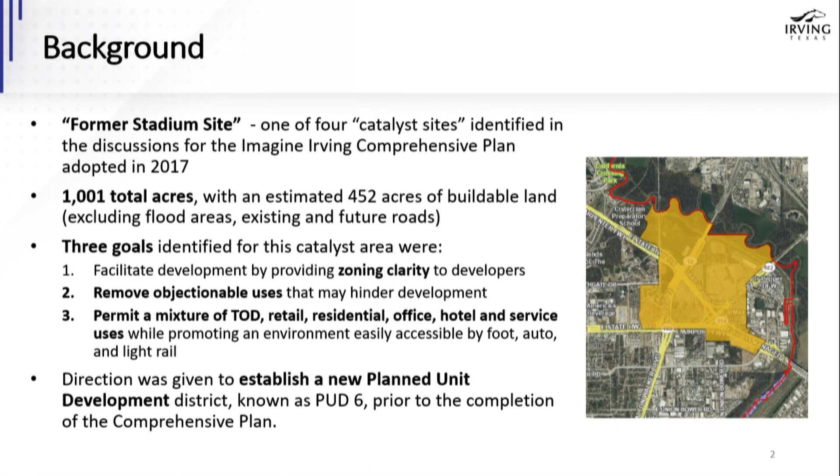There was direction given at the time that a new planned unit development district known as PUD 6 should be looked at prior to completing the comprehensive plan. They really wanted to take action and do that. So PUD 6 was actually developed and adopted. It was written, reviewed, and adopted over the course of about a 6-month period in 2015, and it encompassed this 1,000-acre tract that we identified.

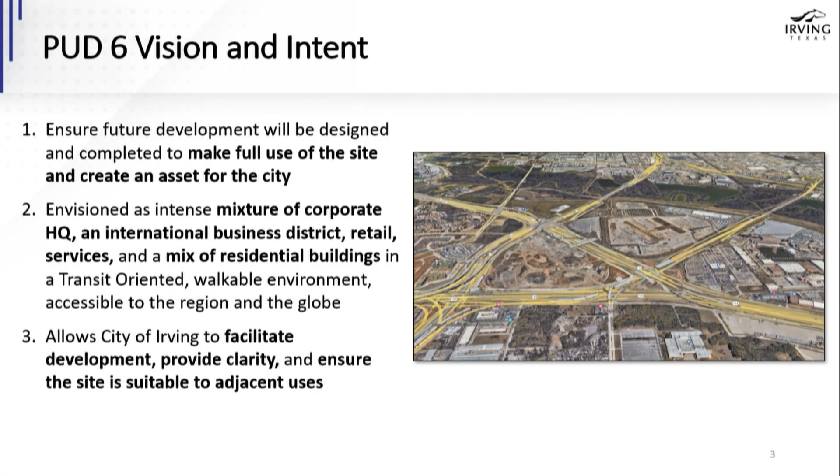The intent of PUD 6, Planned Unit Development Number 6, was really three purposes identified in Exhibit B to that ordinance: to make full use of this property as a city asset, envisioning that broad mix of uses, contemplating something that would be a national and international destination, and then a regulatory structure that would allow the city to facilitate development, working with the developer, providing clarity so the site would be suitable for adjacent uses. So that was the vision and intent of the PUD 6 regulatory structure to begin with.

It is divided into 8 tracts, titled A through H. Each tract had a unique mix of uses permitted, with minimums and maximums in terms of non-residential and residential development. Tracts A, D, F, and G -- Tract D, for your reference, is the city's property, the former site of the Texas Stadium. Tract A is the subject property of this ordinance tonight. F and G are owned by the University of Dallas. It was envisioned that those would be transit-oriented developments, meaning a development that would link transportation and land use.

Providing people with maximum choice of how they get around, and really intensifying that land use at transit nodes, where you might have light rail stations, making and allowing a more intensive use. It typically would be a mix of uses, residential, commercial types of uses that would all be kind of living harmoniously in a transit-oriented development.

So tracts B and C were identified as flex work. You can see that's on the eastern side of 183, on the north and south side toward the eastern end of the property. By flex work, it was primarily an industrial area.

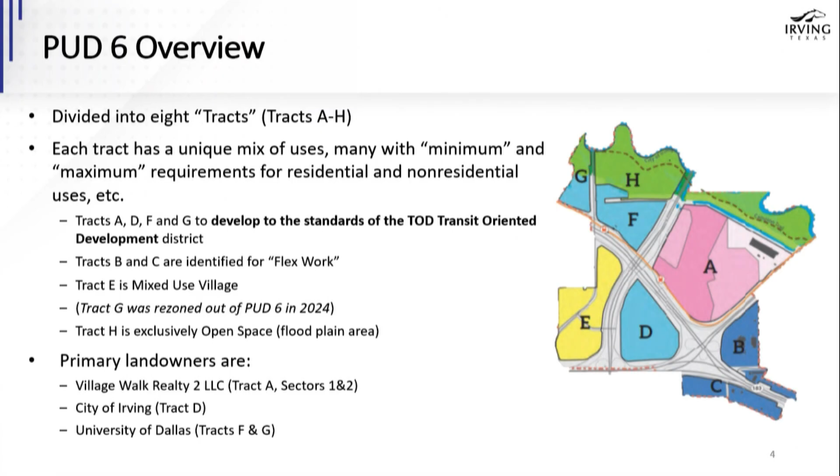There are 3 primary landowners: Village Walk Realty 2, which is the owner of Tract A, sectors 1 and 2. By sectors 1 and 2, you can see there's a couple different shades of pink. The 2 darker shades of pink in Tract A constitute sectors 1 and 2. Sector 3 is actually the FedEx facility. City of Irving, as I mentioned before, owns Tract D, and then University of Dallas owns Tracts F and G.

So in 2023, the Planning Department staff initiated a review of the PUD 6 regulations. In October of that same year, we presented a summary of the findings, along with some recommendations to clarify and improve the regulatory structure of PUD 6. Specifically in mind that we hadn't had a lot of development in PUD 6, with the exception of Tract E, where we had some residential and multifamily development. There was a concern that we really needed to address some issues that staff had identified since the ordinance was adopted in 2015. So we presented those to the City Council.

I think, Jocelyn, am I correct, this was also presented to the Planning and Zoning Commission as well. And the Council asked us to initiate meetings with the property owners, have some discussions, and as those discussions progress, bring back some specific proposals to the City Council that could be reviewed.

During the time we were having these conversations, the new owner of Tract A, Village Walk Realty 2, identified the possibility of a unique and significant development opportunity, this concept of a destination resort. This was a new concept, and so we paused our work on updating the PUD 6 document in order to better understand how that new opportunity might fit within the larger effort to improve the regulatory structure of PUD 6.

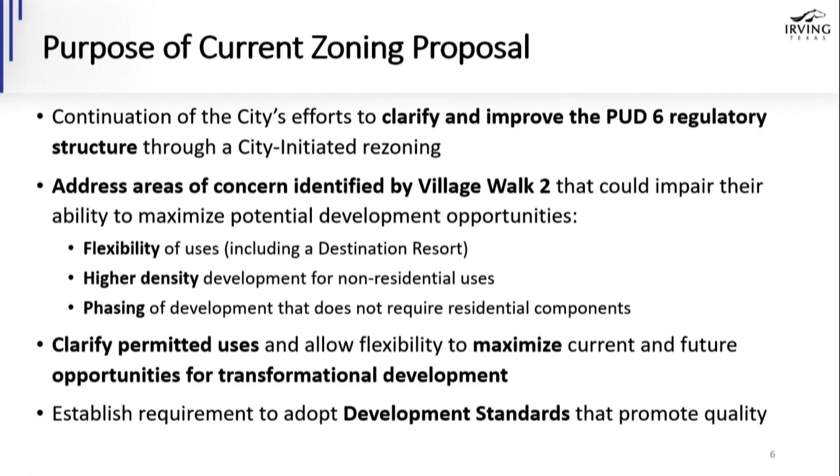All the remaining tracts, including the FedEx property, all tracts B, C, D, F, and H, will remain in PUD 6 as they're presently zoned. So the only property affected by this zoning proposal is what you see identified in purple.

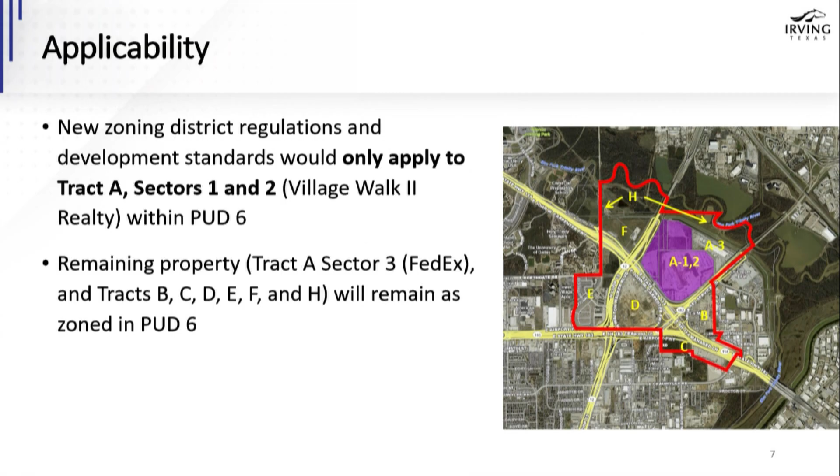So there are 2 proposed amendments. The first one is probably the most consequential: the creation of a high-intensity mixed-use zoning district for PUD 6. The purpose and intent, outlined in the preamble of the ordinance, is really to create an identifiable multi-use area that encourages concentrated development in the same structures or in proximity, in an exciting, engaging environment that maximizes the value of the property within PUD 6.

It establishes permitted uses. It establishes a process for creating and approving development standards, which are really quite important. And it establishes an administrative process for approving regulating plans as the property develops. I'm going to walk through the full ordinance with you and map out how this all flows together. It's a fairly simple ordinance in its structure.

The second ordinance is to amend PUD 6 Exhibit B and designate this property, Tract A Sectors 1 and 2, for a high-intensity mixed-use area that would conform to the requirements of this zoning district we're creating. So we're creating this zoning category and then assigning that zoning category and all its rules to Tract A Sectors 1 and 2. It's a 2-step process.

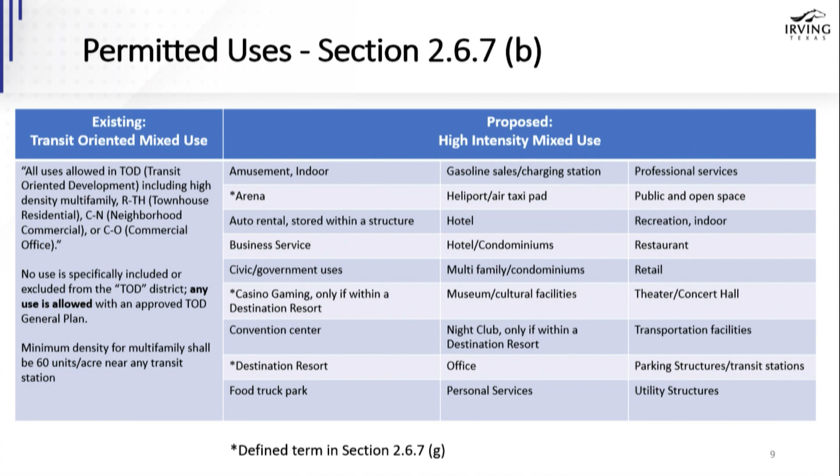We also identify prohibited uses. In the current transit-oriented mixed-use district, there are no expressly prohibited uses. Again, it's silent on uses, depending on the applicant to propose uses through the TOD process, is how that works. Jocelyn, shake your head or not if I'm getting any of that wrong, but I think I'm right on that.

In the proposed high-intensity mixed-use district, we're enumerating specific uses that would be prohibited, which would not be consistent with what would be envisioned as this high-intensity mixed-use area—mostly kind of industrial uses that wouldn't be compatible. Of course, undesirable uses like sexually oriented businesses were listed. But again, the idea is to enumerate those uses that could not be built in this high-intensity mixed-use district.

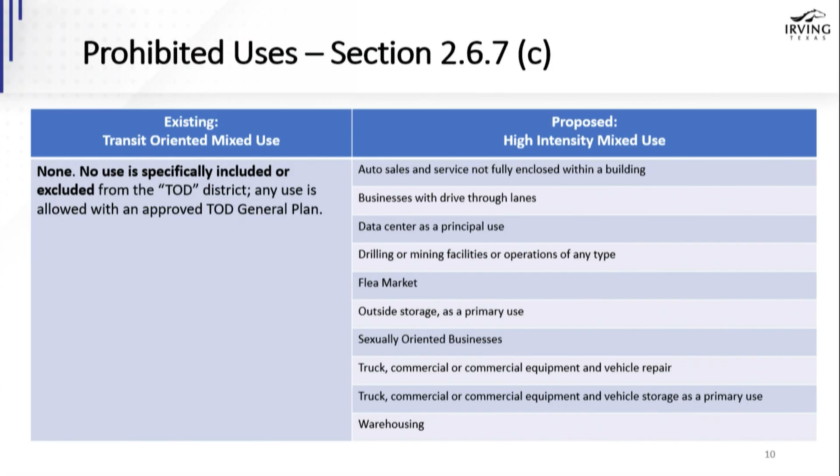We also talk about other uses. From time to time there are temporary uses. The ordinance allows temporary uses to go through the process already laid out in the zoning ordinance for approval, where a person can go to the city council and get approval not exceeding 6 months for temporary types of uses. We also recognize that as property develops and the world moves forward, there may be other types of uses not identified, not contemplated today, that if proposed might be something the city would be interested in. So we've expressly allowed that if there's an unidentified use, they can request that use through the conditional use permit process, which is really a zoning process, but establishes a very specific permit for a use that might be identified.

Alcohol sales would be permitted consistent with what we have in Chapter 3.3 of the Unified Development Code. In PUD 6, that means the alcohol-to-food ratio in a restaurant is a 30-70 ratio that's permitted in PUD 6, as well as the Heritage District and Toyota Music Factory, so it's consistent with those 2 areas.

So let's talk about the destination resort, because this is where the permissiveness of the gaming is permitted. All these other uses, gaming is permitted only within the destination resort. So it's important how you define that.

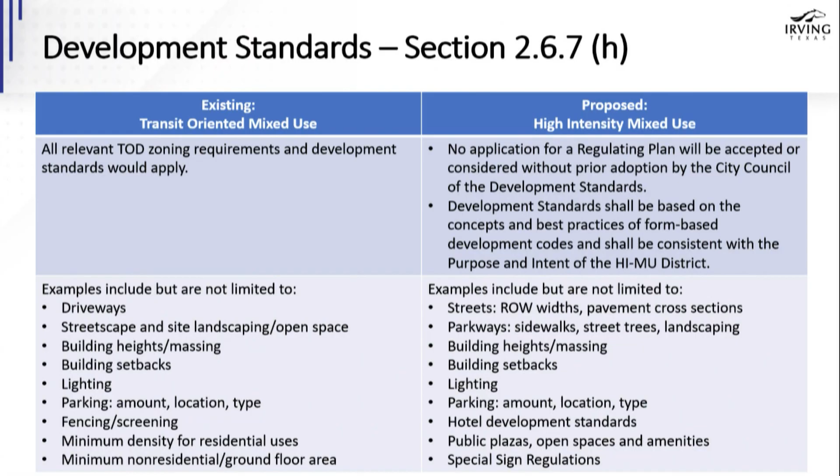We anticipate that would be a collaborative process with the property owner and the city working together to identify a reasonable regulatory structure for those development standards that would be submitted ultimately to the Planning and Zoning Commission, because this would be an amendment to this ordinance, and then to the City Council for final approval.

So then we get to the administrative process. In the TOD mixed-use district, in this PUD, or planned unit development, all development plans are approved by the Planning and Zoning Commission. The City Council would have to approve anything that would be inconsistent with the PUD. If you were proposing uses that were different or not allowed in the PUD, then those would have to go to the City Council. But by and large, if you're complying with all the PUD rules, the Planning and Zoning Commission is the final say.

And I think you had one of those development plans on your agenda last night. I believe that was approved, and that approval is it. That approval doesn't have to go to the City Council.

Development plan submissions can include a variety of things that you would want to look at, depending on the complexity of the development. I think the one last night was for an RAB, am I correct, Ken? So it was fairly simple, and there wasn't a lot of complexity to that.

In a regulating plan under this district, there is a lot of information the developer will have to submit. The street configurations, the street cross-sections, access to highways, building locations, typology, size, use, the permitted land uses generally that are going to be allowed in that development plan. Whether or not a destination resort is part of that regulating plan would have to be identified in that submittal.

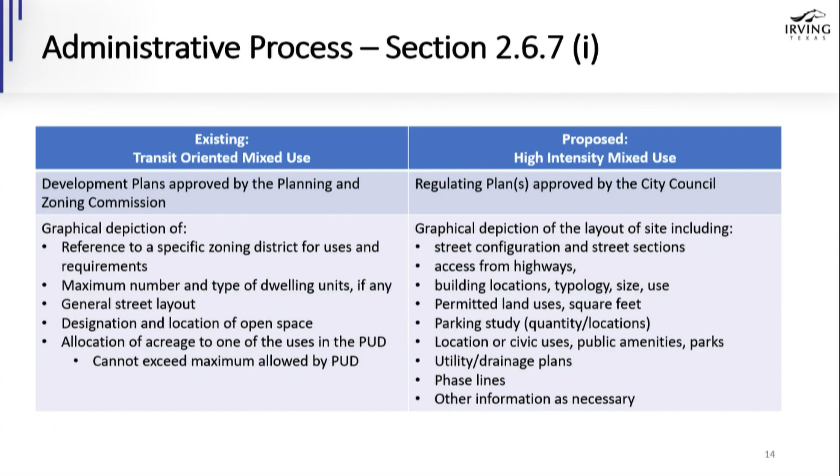The second ordinance is this amendment to the PUD 6 Exhibit B, which was identified as the primary concern when we looked at PUD 6 initially, was how does Exhibit B work? And so how this would work is that we would propose to amend Exhibit B to allow Tract A Sectors 1 and 2 to be regulated under the high-intensity mixed-use district. We would remove all references to the TOD as it applies to that, remove all references to Tract G as kind of a cleanup because that was already removed from the PUD, revise updated references, kind of housekeeping items.

The main issue is kind of putting this high-intensity mixed-use regulatory structure as it applies to Tract A Sectors 1 and 2, and then kind of cutting off any connections that aren't relevant anymore. And that's what you see in this amendment to Exhibit B.

By way of comparison, the land use designation in this proposal would be high-intensity mixed use instead of transit-oriented mixed use. We would keep the cap on number of residential units at 3,750, which is the cap that exists today for Tract A sectors 1 and 2. We're not proposing to increase or affect that; it would remain. The maximum number of residential square feet we're not regulating, because units should be the thing we're concerned about, not how many square feet it occupies. But we are removing the cap on non-residential square footage to allow much more dense development.